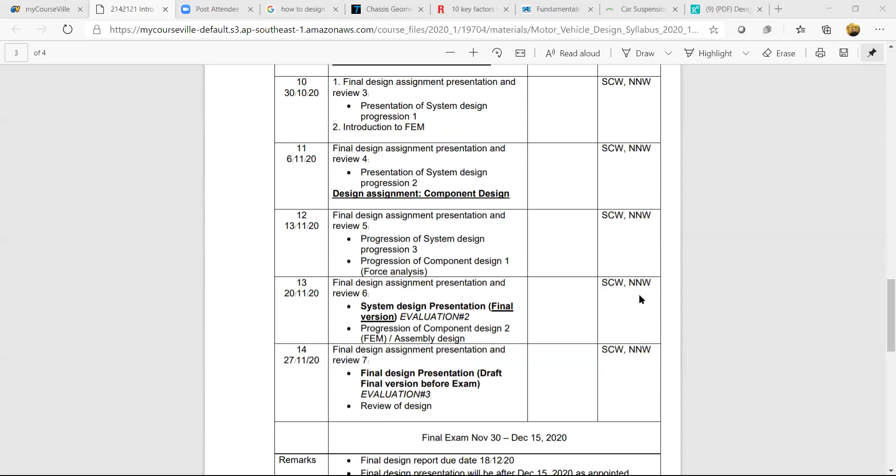Okay, first I would like to update about the study program in the syllabus. Again, you can see we are now in week 7, and after this week there's no more review or lecture, but it will be comments for your works. Okay, this means I will give you an assignment, and you follow the instruction and make, for example, this time the conceptual design, and we will evaluate you every week. Okay.

Next week on Friday there will be the commencement day, but for the bachelor degree it's not on the Friday. So I guess we will still be able to do the online class anyway. So next week you have to present the first draft of your conceptual design progression. And after midterm week, we have the presentation for your conceptual design. We don't have a midterm exam for this subject, but you have to do the conceptual design and present after the midterm week.

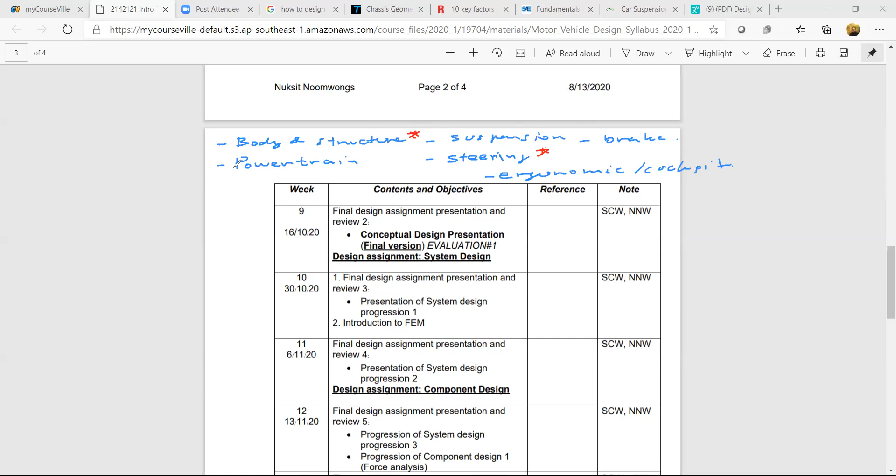As I informed you before, you will have several systems. For example, body and structures, powertrain, suspension, steering, and brake. Some extra work will be included related to many systems. For example, ergonomics and cockpit. This will concern many groups, for example, body and structures, steering, because you concern with the cockpit, and powertrain and brake also have to concern with this.

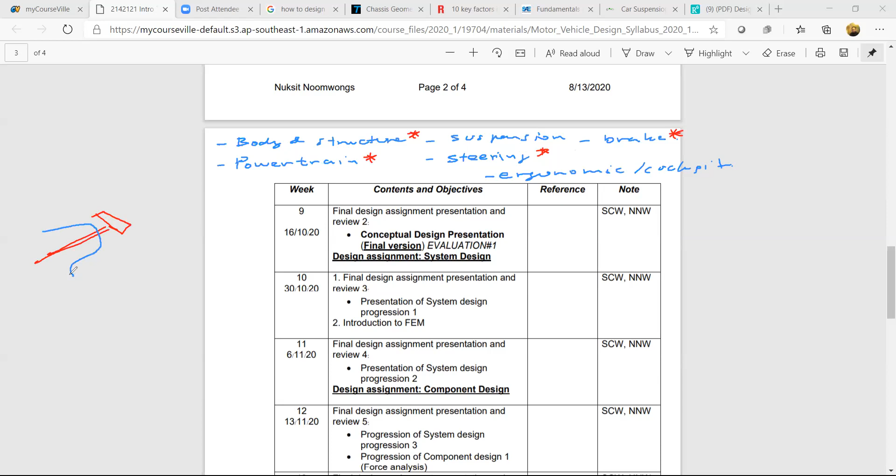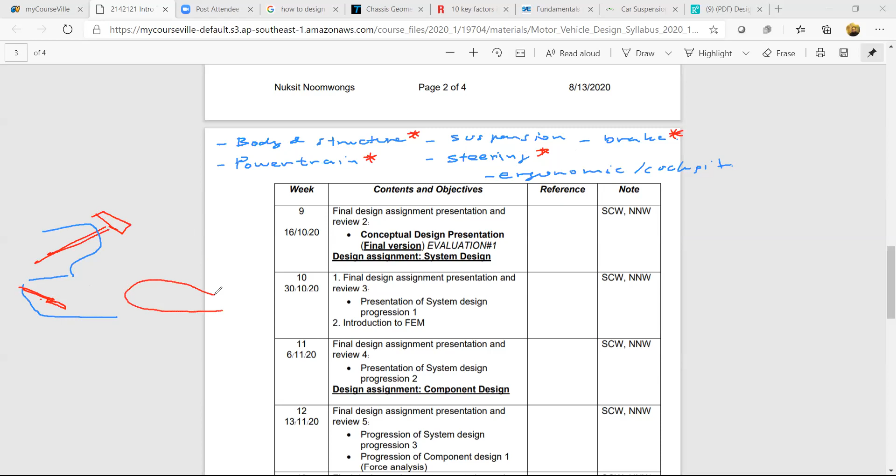Okay, because when you design your steering, you have to consider the ergonomics, and you have to know where your consoles are. And also for other groups, you have to know where your pedals are. And push out the seat. Oh, sorry. Okay, so everything has to be considered in the ergonomics of the vehicle. So it's concerned with many groups.

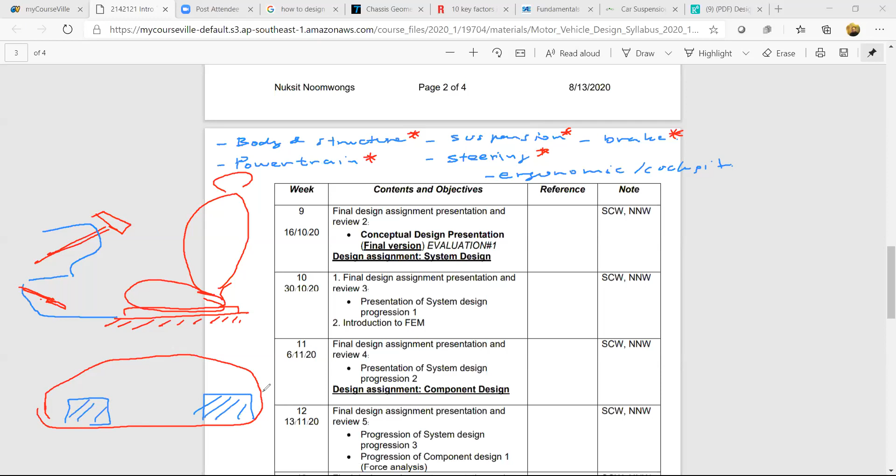Okay, maybe only suspension is not concerned much about ergonomics, but actually you have to concern with ergonomics as well, because when you design the layout of the vehicle, the suspension may have an effect on the space in your vehicle, both in the front and the back, and it has an impact on the design of the cockpit as well. So suspension still has something to do with ergonomics and the cockpit design. Okay, you have to work together with your friends.

So in these 5 groups, you have to decide who will be in which group, and the number of people in the groups. I can say that the maximum number of people for body and structure is 3. Suspension is 3. Steering is 2. Brake is 1. Powertrain is maybe 2. I'm not sure how many people are in your group. For this, you have about 11. You have 12. You have to consult with me about which group the extra one should be in.

Okay, this is the number of members in each system in your groups. Okay, so this week you will have some score, and you have to present every week. The week after that you have to present the progress for the system design. We let you present progress two times, for two weeks, because you take time designing the system. So we let you have a mini progress presentation.

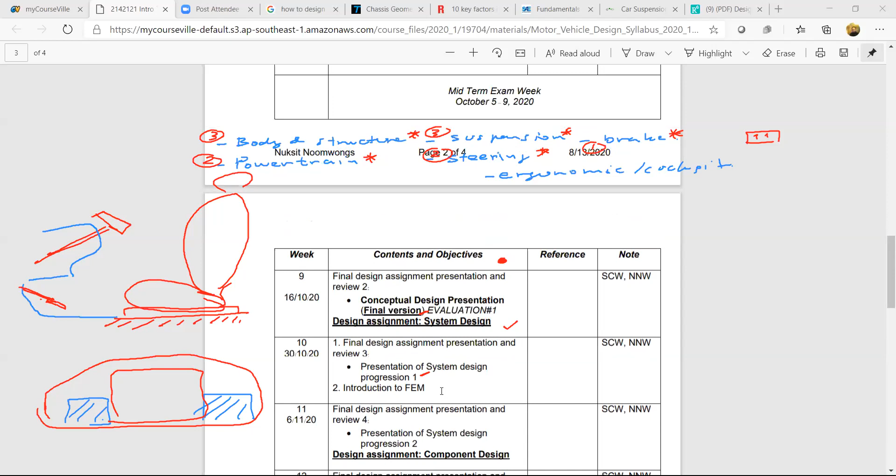We let you present the draft of the system design for three weeks. And along those three weeks, we give you the next assignment about the component design, concerning the detailed designs of the components inside your systems, as well as the analysis of the strength of your components using the finite element method. Okay.

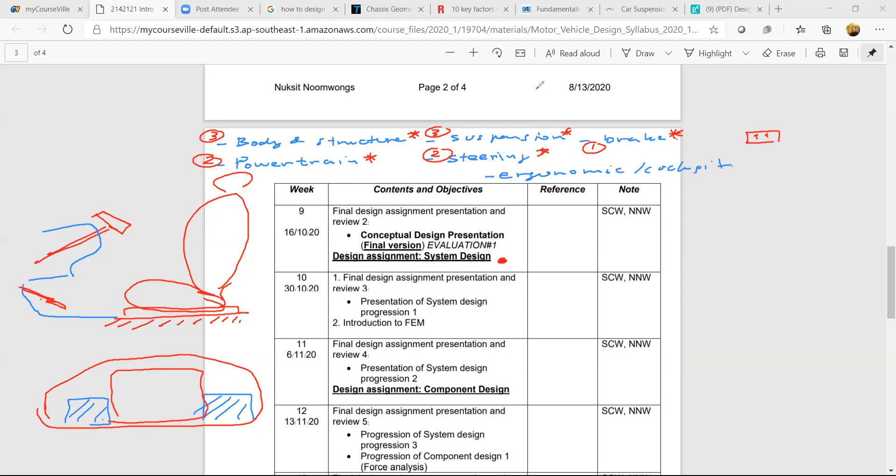Okay, so you can see that you will have score again in week 13. You have to present the final version of your system design, and we give you score, and also show the progress of the component design too. And in the last week, week 14, you have to present your final design, and we keep the score. But this is not yet the final

exam. You still have time to complete your work until the final exam date, which will be around the middle of December. The design report due date has already been set to December 18. And before you have the final presentation exam, you have to submit the final draft version. I will let you correct something after the

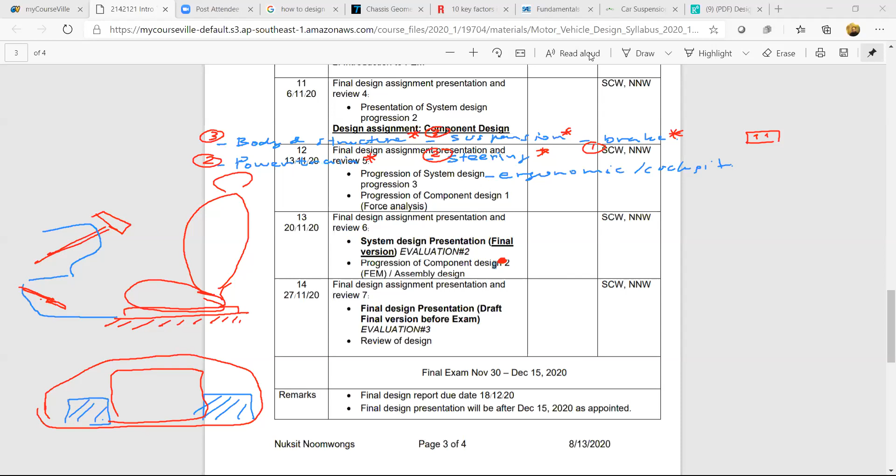presentation exam. In the presentation exam, you will present your work to me and Ajahn Sanhapos, and we ask some questions like an oral exam. In the oral exam, it will be only one student. It's a one-by-one exam, so it takes time for your final exam. Do you have any question about the plan for our class after this week?

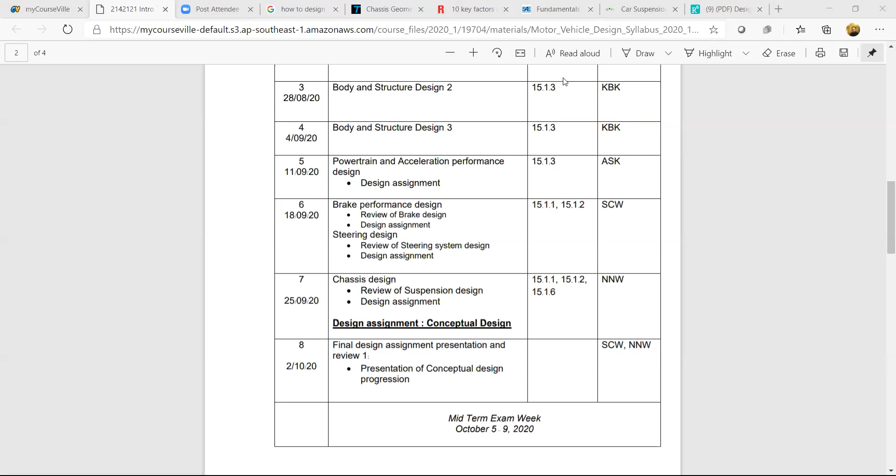You can see that for assessment, the evaluation of the design assignments, which are conceptual design, system design, and component design, is 30%. That's quite a big number. And every week that you present your progress, you also have points, but smaller, about 3% per week. Another one is homework or assignments from each instructor for 10%. The final exam in total is about 45%: presentation and oral exam is 20%, and the final design report is about 25%.

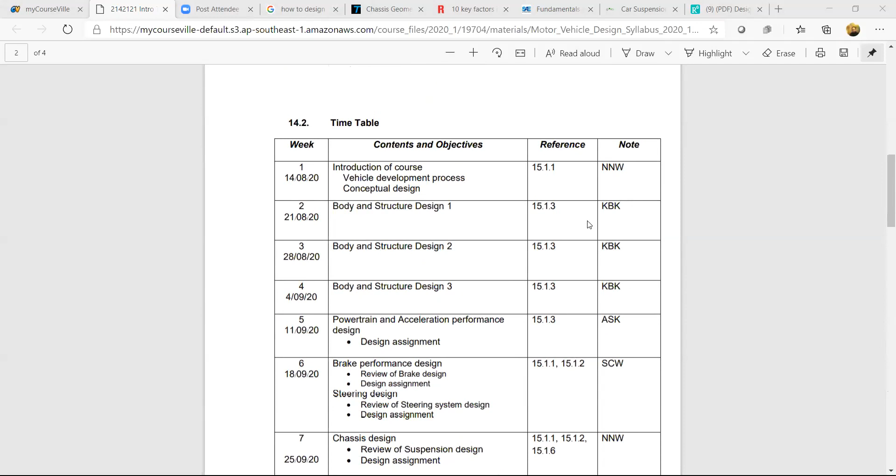The number is a maximum, so you can reduce the number per system in the group. For example, you have 9 people, you have body structures... Last semester, some students worked on two systems because of their own interest. It's also acceptable, but you have to inform me first. If you have 9, maybe body structures 2 or 3, powertrain about 2, suspension 2 or 3, steering 1, brake 1. So about 9.

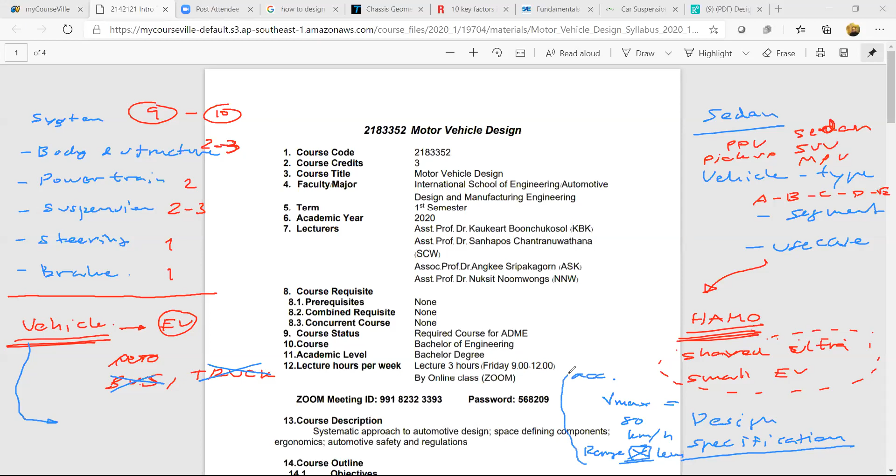Then from this you go further in terms of design specification for the powertrain: what is the motor size, what is the battery capacity, what is your drive pattern from motor to wheels, and so on. Then in the system design, you have to do the design in detail with calculations to know exactly what size of motor you need.

And you have to evaluate your design, testing with many scenarios that your motor has enough torque and power to cover those scenarios. Or from the detailed calculation, you can check the precise number for the range, because you have to decide the size of your battery in kilowatt hours. Then you know the usage and energy consumption, and you can evaluate your range design.

For suspension or other systems in conceptual design, you have to link to the use case too. For example, if you design vehicles for the sport market, you have to think about good handling rather than good comfort. So the suspension design will aim for good handling in the type of suspension you choose for front and rear, and how to design the springs and dampers in your vehicle. The values will be different from vehicles that need more comfort than handling.

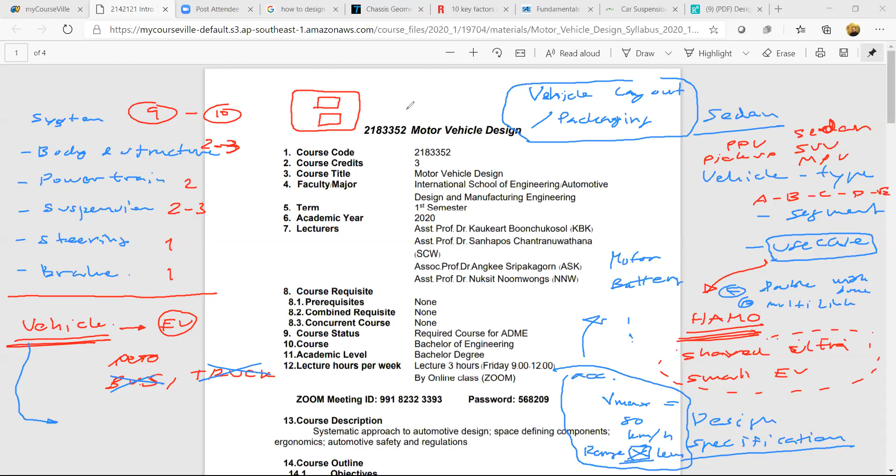You have to decide about the space in your vehicle. Which space is spare for the cockpit that has 2 seats? How is your drivetrain pattern? Okay, it will be front wheel drive or rear wheel drive or all wheel drive. If you choose front wheel drive, where is your motor? Your motor can be at the front wheel, drive the front wheel, or the motor can be at the rear and drive the front wheel. It depends on your design.

And when you look from the front view of the vehicle, you can see the wheels, the suspensions. Different types of suspension give you different space. For example, if you have the MacPherson strut here, you have like this one, and then you have to do like, okay, where's the motor? Where's the differential gears? Where's the drive shaft? Where's the steering?

Okay, so you have to sketch the layout and the packaging and check that it can fit in your dimension of the car or not, because you have to decide the dimension of the car: the width, the length, the height, the wheelbase. So packaging layout is very important, because after that you will use this as the start point of your system design. Every subsystem in your team will use this as the same information that every system shares.

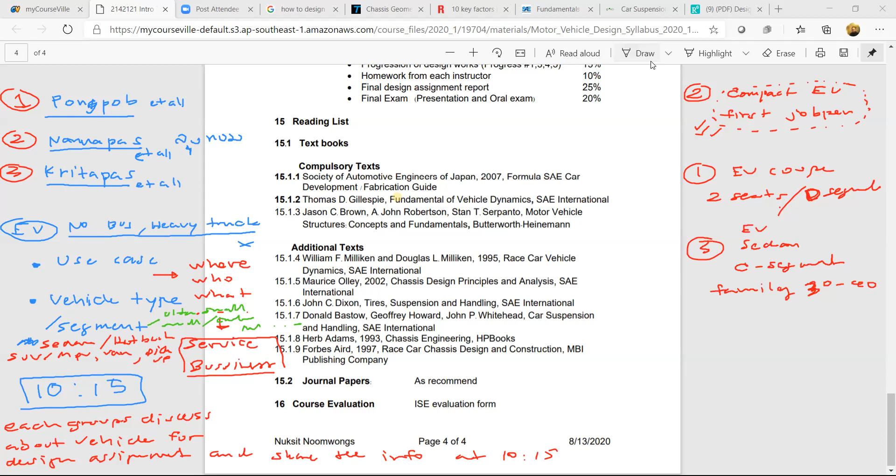Okay, next let's see our assignment in myCourseVille. I think you can see it now. I pushed many documents and information websites into myCourseVille. For the suspension, I put 3 items in the lecture slides folder. I will explain this later on when we talk about suspension. I will talk about the assignment first.

When you go to the assignment, you can see the assignment title, vehicle benchmarking and conceptual design. When you click on that, you can see some instructions. We have two sub-assignments inside. The first one is benchmarking, the second one is conceptual design. Actually, conceptual design is the bigger one. For the benchmarking task, I will ask you to define the target of benchmarking. That's what you did as we discussed.

You know about your vehicle: segment, use case, type. Then you can select your benchmark vehicles to be close to your vehicle. Sometimes if you cannot find exactly the same, benchmarking to vehicles that are close to your segment is also okay. Clarify the use case, the usage or type of vehicle. You already did it here. Second, you have to choose at least 4 vehicles for the benchmark, and you can find information from any sources, from websites, from anywhere.

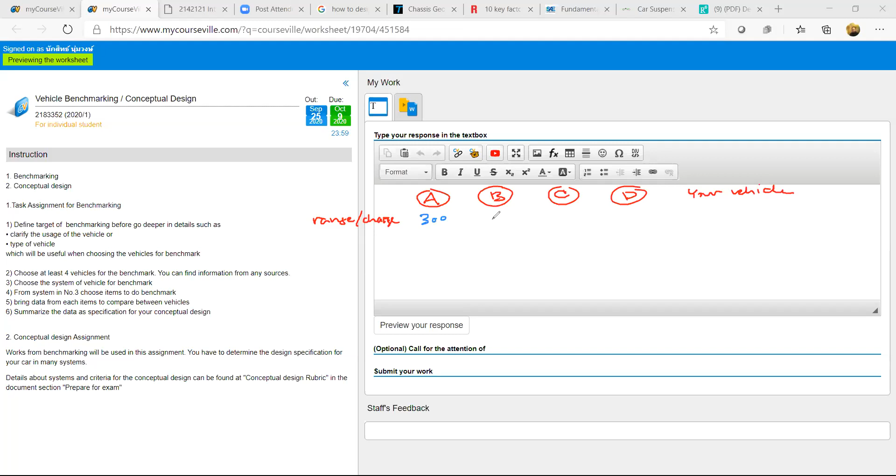Okay, we may have many items and systems to benchmark. For example, if you do benchmark about range per charge. Okay. Vehicle A, for example, has a range of about 300 kilometers per charge. Vehicle B has 250. Vehicle C, 400. Vehicle D, 350. So what is your range as a target for your design?

Okay, the target for your design is called the design specification. So how can you decide which range number should be your design target?

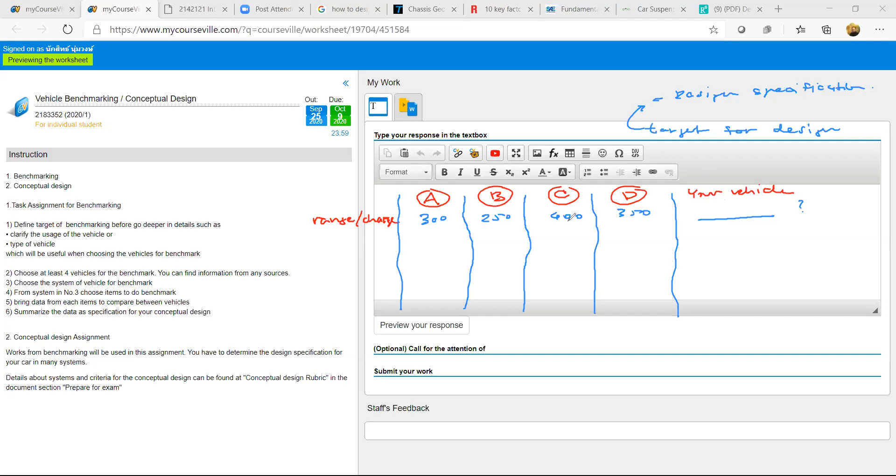Someone said, okay, we go to the top. We always go to the top. Okay, top is 400, we go 400. Or someone says, okay, we go minimum. Then you get 250. Or someone says, we do average of everything, and we get our design target. Which one is correct?

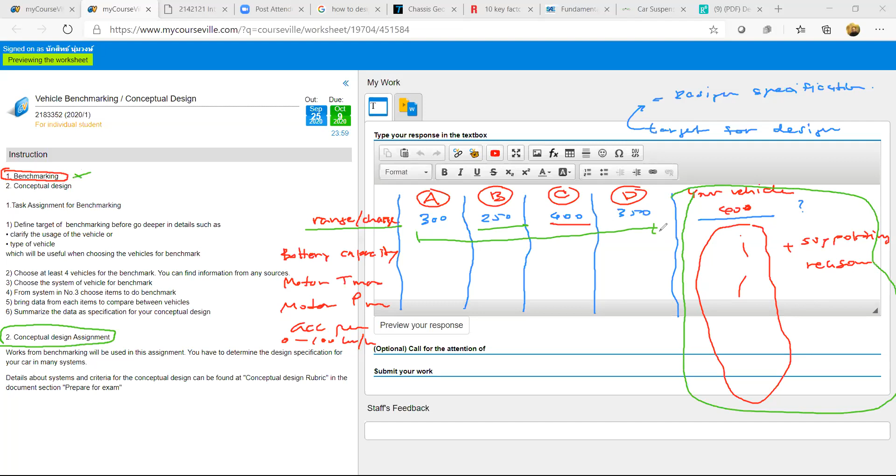This part concerns the conceptual design for the design specifications. The first one, just comparing is enough, but the second one you need design specs with reasons, and you can know the conceptual designs for car systems and their criteria from the document, conceptual design rubrics. I posted it in another section, in the prepare for exam. Okay, so if you go there,

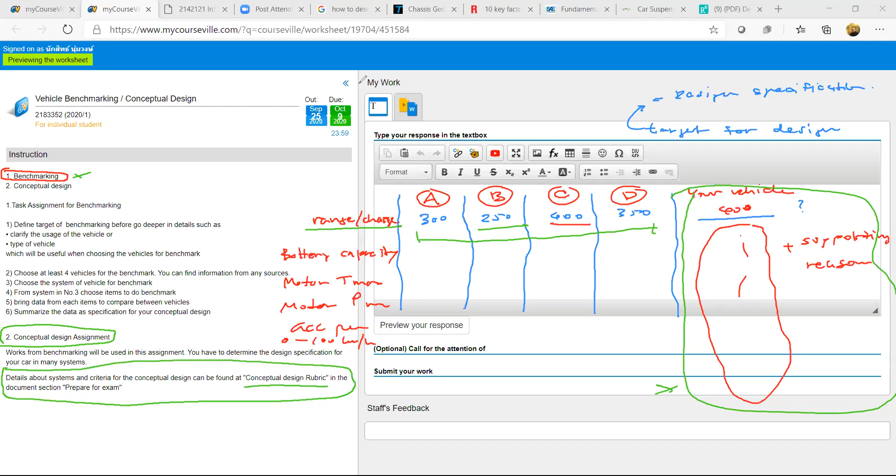you can see the folder exam preparations. And if you click it, you can see the conceptual design rubric. Okay. When you click it, you can download the document that is the rubric for the conceptual design.

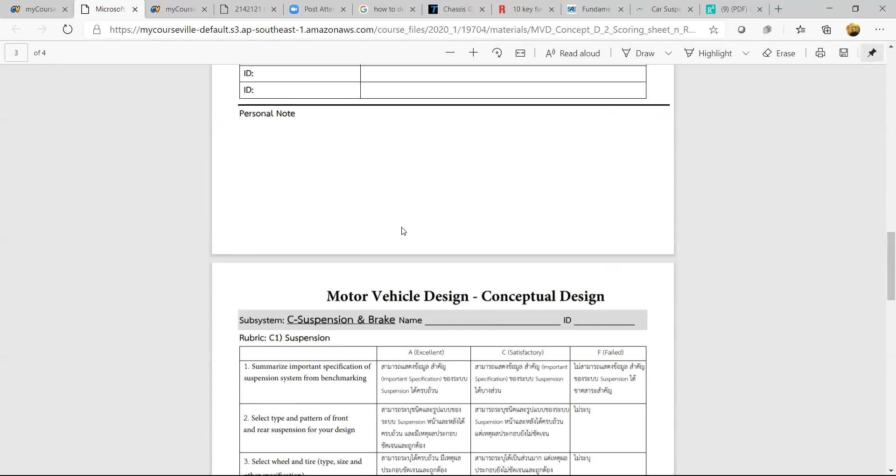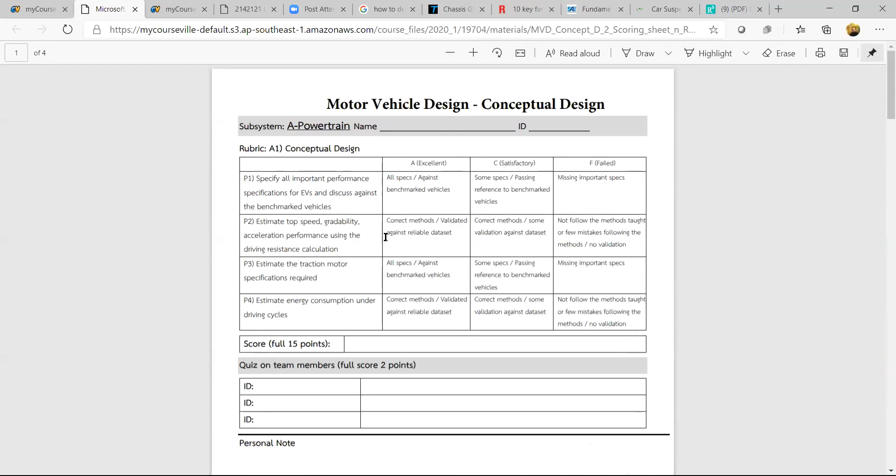You can see that it has the subsystems. First one is powertrain. Second one is body structures. Third one is suspension and brake. And the last one is steering and vehicle integration. Each system has details of what you should do in the conceptual design, with criteria: you get excellent if you cover all of this, just satisfy if you cover this, and fail if you cannot do it.

Okay, so for example, powertrain. The people in the powertrain groups should focus on this. Here you can see number one: specify all important performance specifications for EVs and discuss against the benchmarked vehicles. You get excellent if you have all specs against the benchmark vehicles. If you have some specs, maybe just satisfy. If you miss, it's fail.

Number two, estimate top speed, gradability, and acceleration performance using the driving resistance calculation. This may relate to the lecture from Professor Anki. For excellent, you do it correctly and have validated data. You get about C if you have a correct method but miss the validation. And F is if you miss the calculation and also the validation.

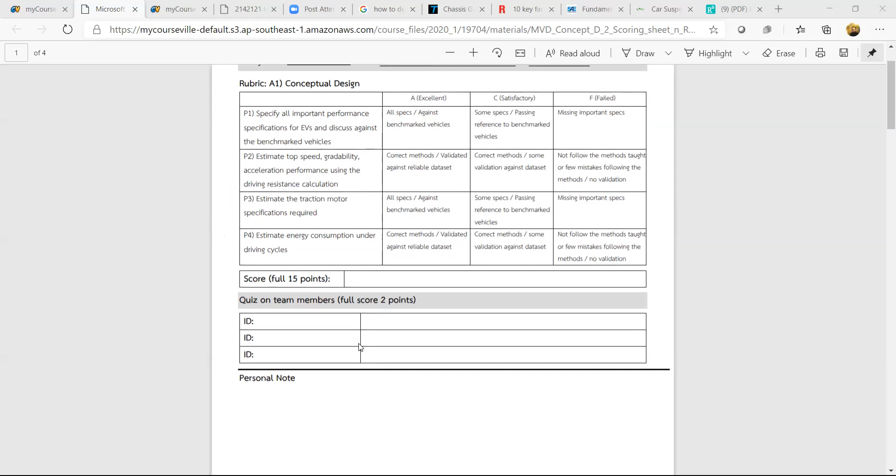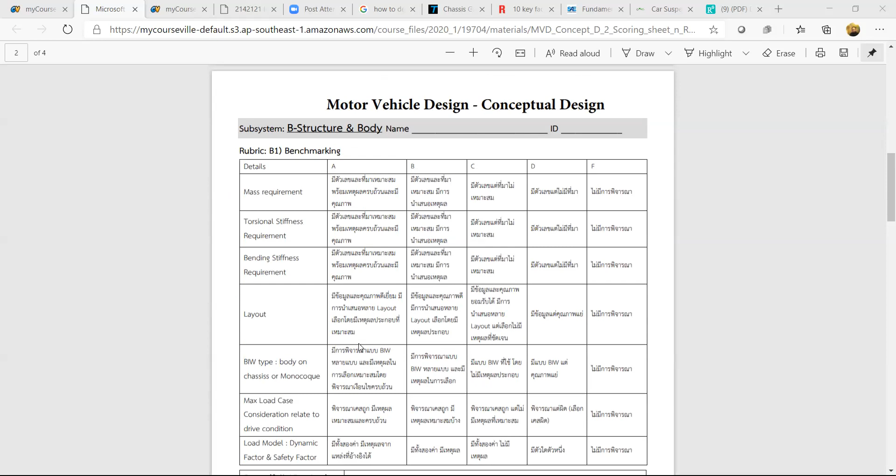That's about the first group, the powertrain. The second group, structure and bodies. Sorry that the criteria is in Thai, but the details are in English. So you can see that there are many details in this one. You can see the mass requirement, torsional stiffness requirement, bending stiffness requirement, layout of your structure, body in white type. You have to choose what type of structure you will design, body on chassis or monocoque.

Max load case consideration related to the drive condition. It's like you have to state which load case you will use in your design. You don't need to show any calculation, just explain what kind of load case you will use in your design. Okay, and the load models. It's about the value of dynamic factors or safety factor you will use. Okay, you don't need a lot of calculation. Okay, just a simple one.

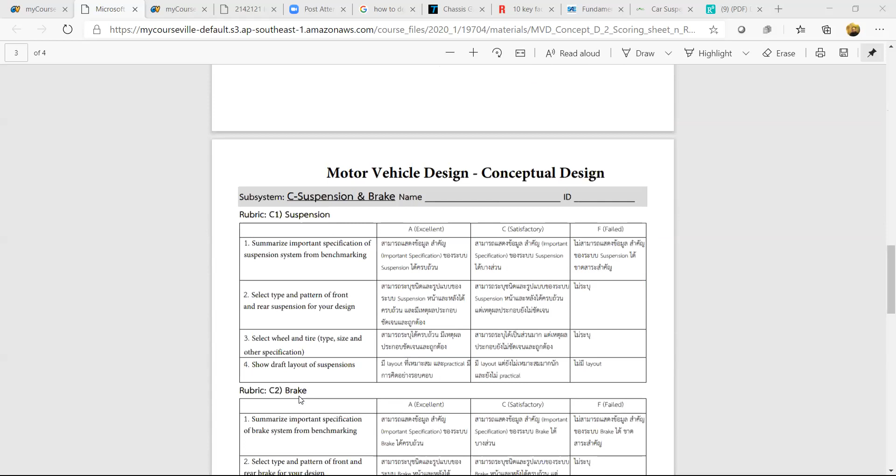For suspension, okay, you have to summarize important specifications of the suspension system from the benchmarking. Then select type and pattern of front and rear suspension for your design. And after that, select wheel and tire. Okay, you have to specify type, size, and other information that is needed. And then number four, show the draft layout of your suspensions. You have to sketch the layout.

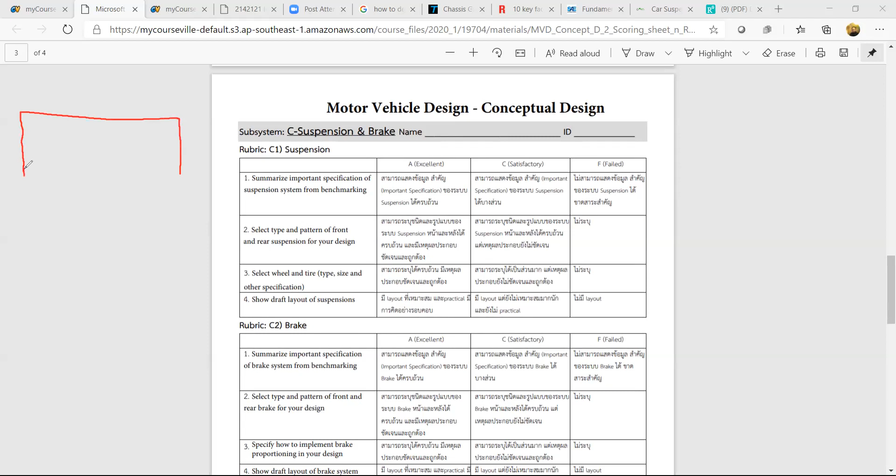In the conceptual design, I think design specification is one of the important things that you have to deliver, but another one is layout. You have to do the layout of your vehicles in the conceptual design in many views. For example, if you do it in the top view, you can show some information of dimension and packaging. For example, you have wheels like this. Okay, and then you can show the wheelbase in how many millimeters, or the size of the vehicle for total length, how many meters, the width, in how many meters.

Or when you see from side view? Okay, maybe your vehicle is like this, for example. The side view, you can see also information of the wheelbase, the height of your vehicle. You know the ground clearance. Okay, you know wheelbase, same as the top view. Okay, and then you can know inside the vehicle, not only the outside dimensions.

For example, for the top view, you should show where the batteries are. For example, if your battery is here, you should put the dimension of the components inside the vehicle as much as you know. Because you have to make sure that it can fit into the vehicle that you design, because you have limited space, limited dimensions. For example, if you just say that, okay, we have battery at the middle, and the battery size depends on capacity, and then also depends on the range that you need.

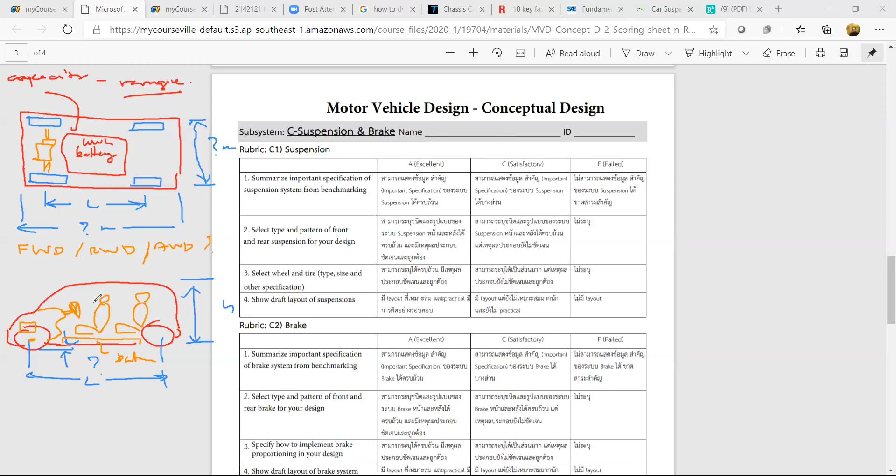Layout should have at least 3 views. First is a top view. Second is a side view. And the last one is a front view. You should also show the front view of your vehicle. For the front view, you can see some details of the front. For example, where your motors are, how they relate to the differential gears and the drive shaft, and where is your steering? Something like this. So you should show it with the seat inside the cockpit, something like this. So you have to show in 3 views, top, side, and front.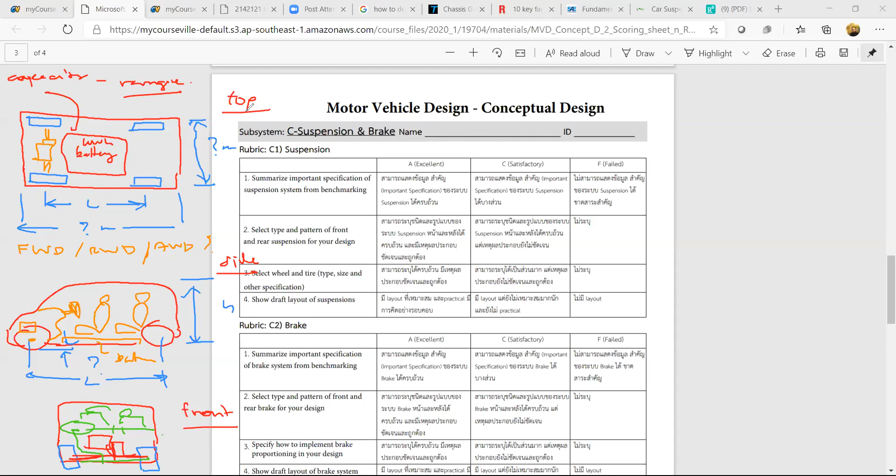At least 3 views. Okay, and we have the criteria, the rubric for the brake system. Okay, it's almost the same as the suspension. Okay, I think I should explain about the layout of the suspension. You can see that in the layout of these vehicles, I didn't put suspension into the layout yet. You should put it in the layout too, because the suspension will interfere with some parts if you didn't consider this at the first hand.

For example, here you may need space for the double wishbone or not. Where is a wishbone? Where is a spring? How can you see in other wheels? How about the rear wheel suspension? Maybe it's a twist beam or something, or double wishbone or multi-link. So you have to draw it. For this one, it can be a hand sketch, okay, CAD not yet needed. But for the system design and component design, you should do the CAD, okay.

For the brake, you do the same. You have to summarize the important specification of the brake system from the benchmark, and then select the type and pattern of the front and rear brake for your design. And then specify how to implement brake proportioning in your design. For example, if you use a proportioning valve, or you use something like electronic brake distribution control, you should state which one you will use.

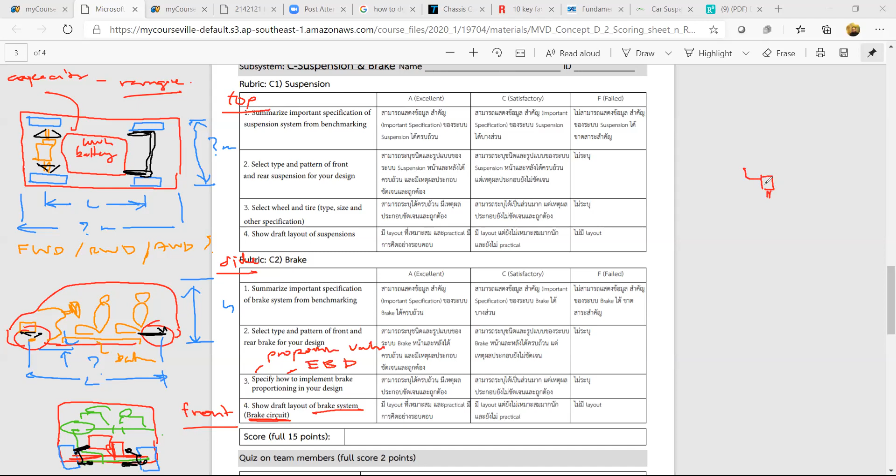Okay, and then you have to show the layout of the brake system. That means a brake circuit. So you have to draw from your master cylinders the circuit. What does this circuit look like? Okay, is this a diagonal type or front and rear or 4-wheel and 2-wheel or something? You have to draw the layout of the brake circuit.

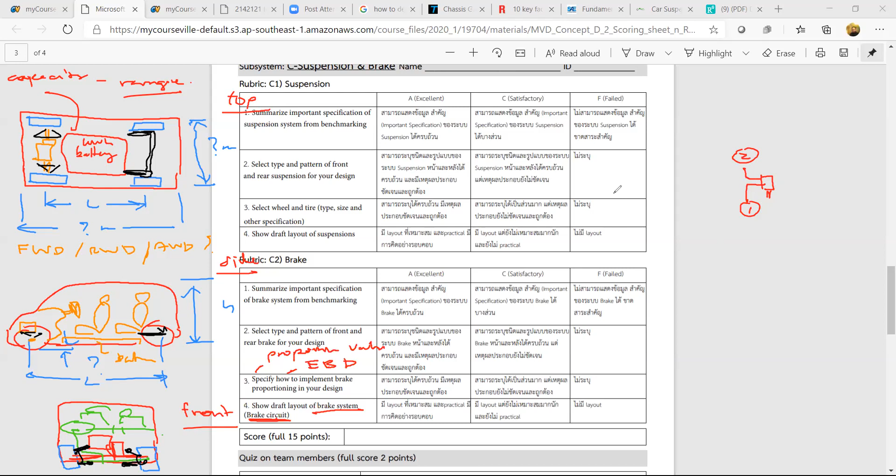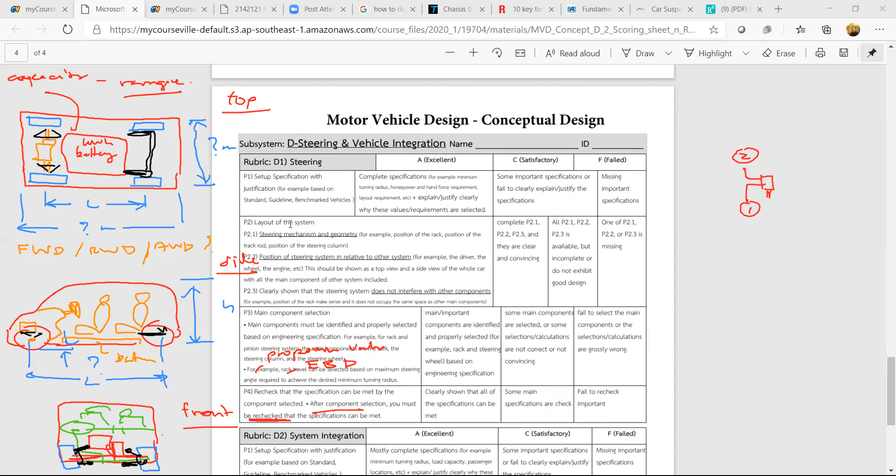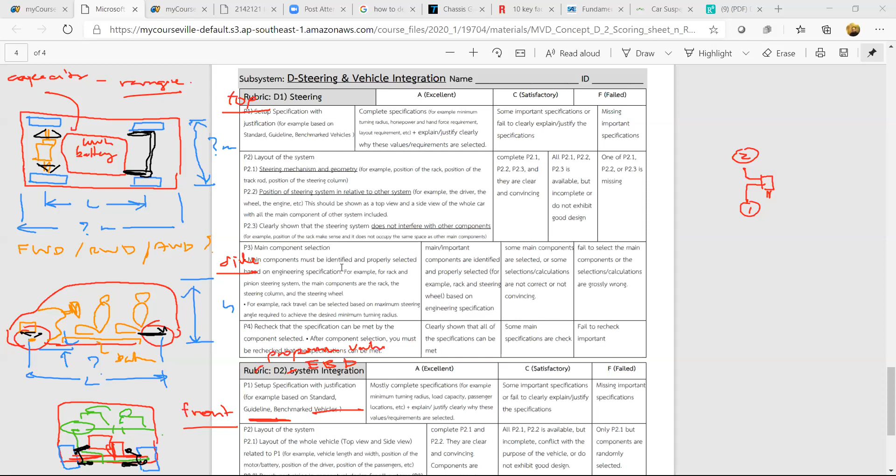Okay, and the last one is about the steering and vehicle integration. Okay, for the first step, you have to set up specification with the justification, based on benchmark again. Okay, and number 2, layout of the system. You have to lay out the steering mechanism and geometry, and also the position of the steering system relative to other systems, and clarify that the steering system does not interfere with other components.

Number 3, you have to select the main components of the steering system. And then number 4, recheck that the specification can be met by the components selected. Okay, and for system integration, it's about integrating systems together. This one has to work with many groups. Okay, it is a guideline. First one, set up the specification with justification. I think it looks the same as the steering system, but it is used for systems that integrate together.

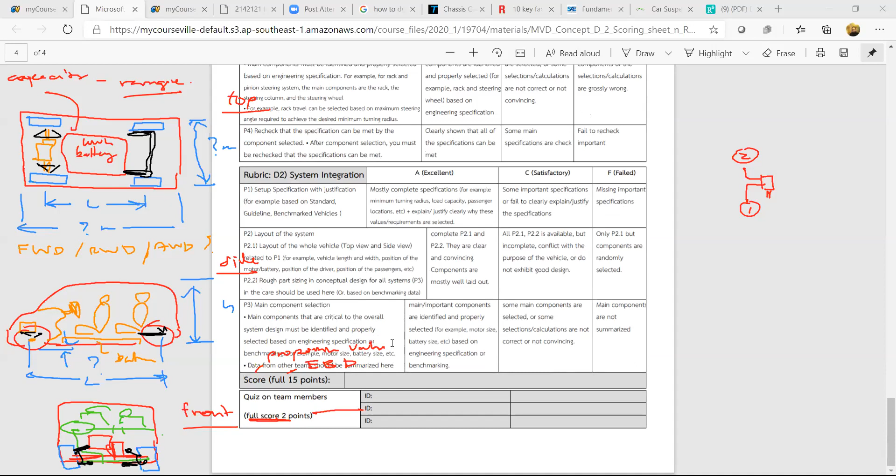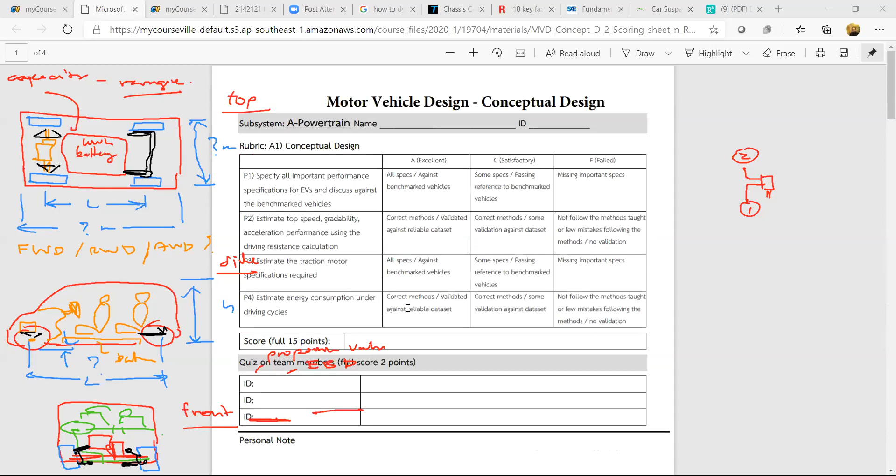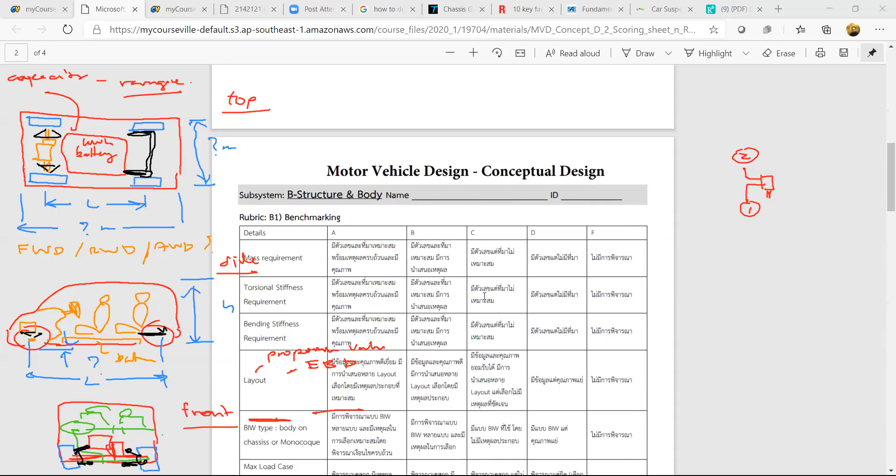Okay, so you use this rubric as your guideline for your conceptual design works. Okay, which parts you have to do, and don't miss them. Okay, and when we score, we will look at this rubric to see whether you meet all of the requirements or not. Any question about this rubric for the conceptual design works?

You can download it from the myCourseVille. ไม่มีเนาะเงียบเลย

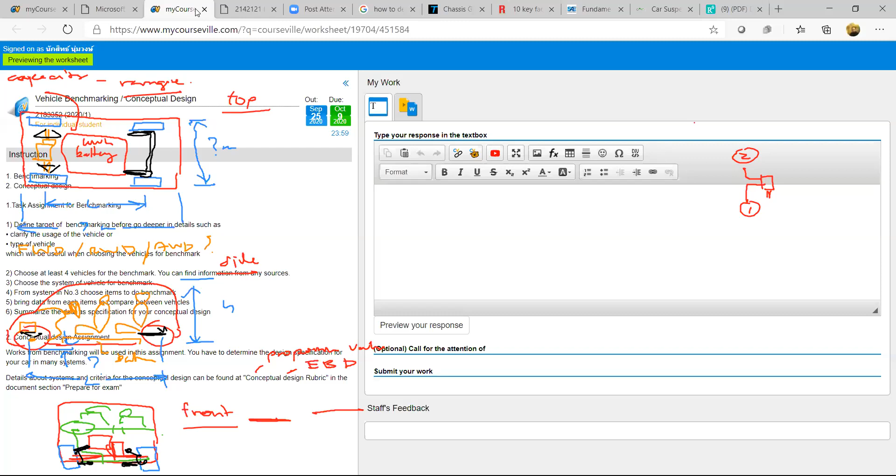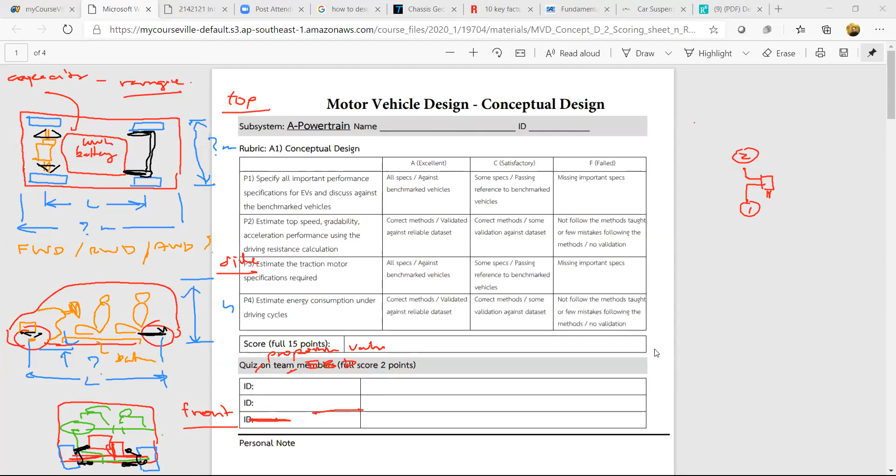Okay, if not, I would proceed to the suspension design review. Okay, next for the suspension design review. Oh, okay, before that, the assignment for benchmark, yeah? The conceptual design is a group work. But for benchmarking, since you have many people, you have to do some work to ensure that all of you have worked in benchmarking. Because you have like 9 people doing the benchmarking together. Maybe you have to choose many items to benchmark. Okay, this is a group work.

Okay, for the suspension, it's based on what you learned from the vehicle dynamics class last semester. We refer to the lecture slides and materials that we used in the vehicle dynamics class. But we will add on some more tools and information here. The step to design the suspension is, first, starting from selecting suspension type and pattern for the front and rear of your vehicle. It's been done in the conceptual part already. Okay, we should decide here in the conceptual design.

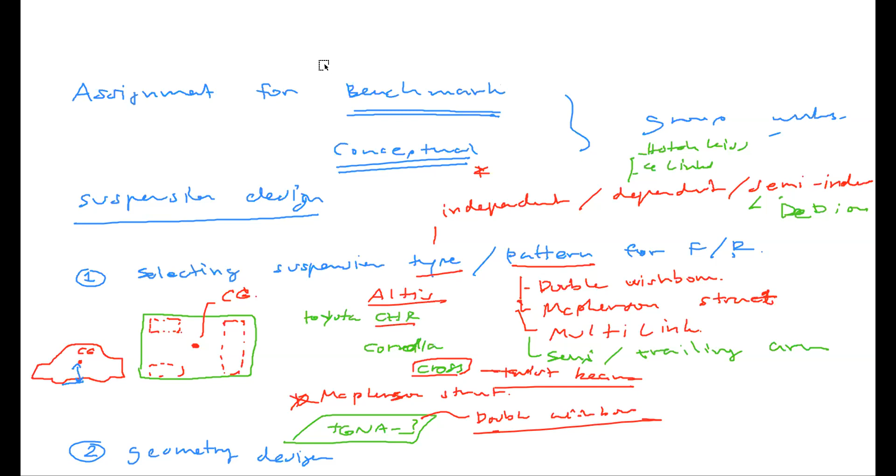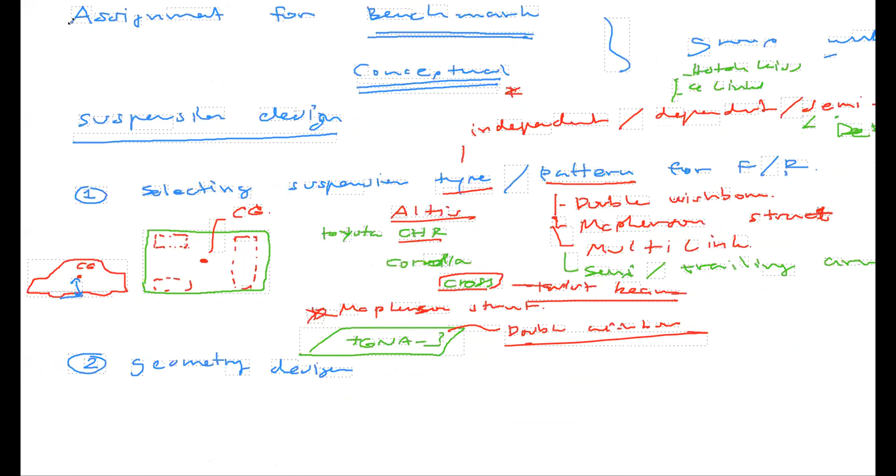Then after you select the suspension and do some layout analysis, you move to the next one. This is about the geometry design. What is geometry design about? What is your suspension geometry design about?

For example, if you choose a McPherson strut, you need to decide where to put the strut, the angle of the strut, and the control arms. It's about the coordinates of the major points. This one is the strut top mounting point to the vehicle structure, and this point is the connecting point to the knuckle. In geometry design, you need to know exactly these coordinates, X, Y, Z. This one as well.

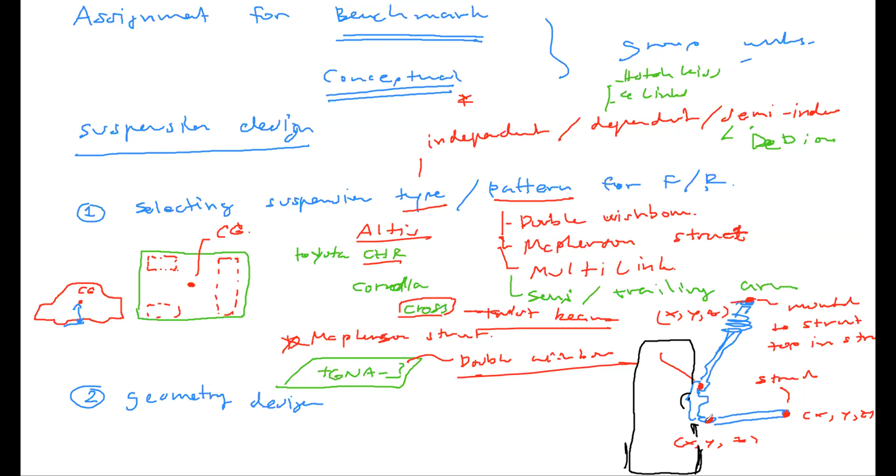Because different geometries give you different suspension performance in terms of handling and comfort, since this is used to control the movement of the wheels and tires. And for this part, we have supporting programs called suspension analyzer.

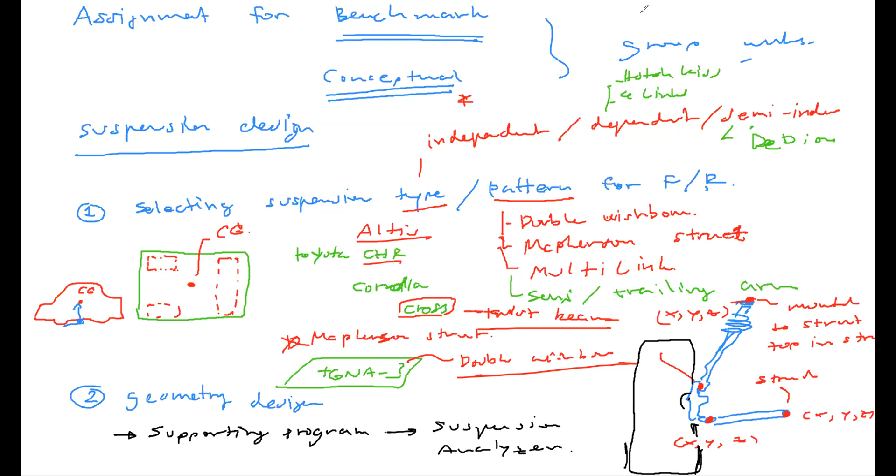Okay, in the suspension analyzer, you can use it to analyze your geometries of the suspension. You can know many parameters after you put the coordinates of the mounting points of the suspension into the system. You can simulate to know the value of many things.

For example, roll center, and how is the alignment. When you have, for example, roll angles of these degrees, how much alignment changes in your suspension, in camber, in caster, in toe, you can check it from the program.

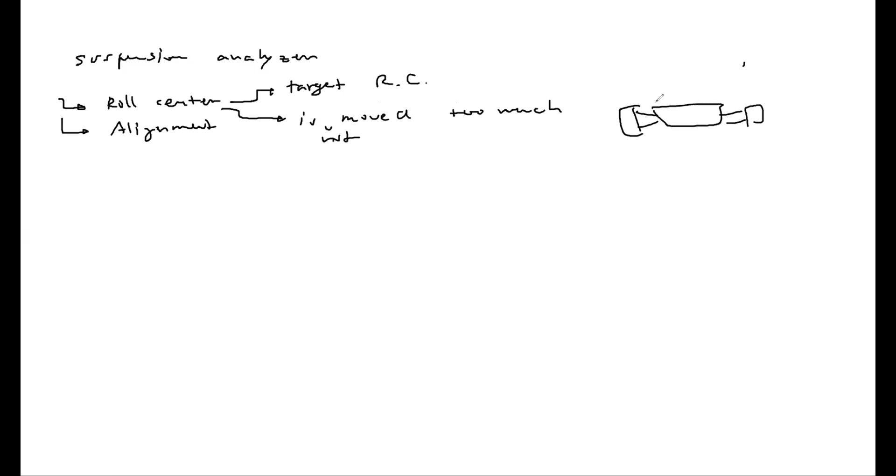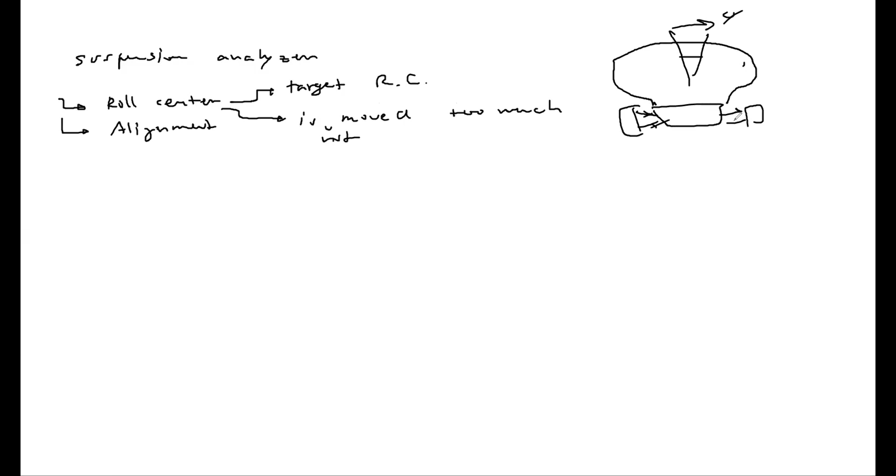So you may have to select your target for roll center, then change the geometry until you reach your roll center target. And you have to check that your roll center is not moved too much. Because when roll occurs, when your vehicle rolls, it can change the geometry of the suspension, and the roll center can change position.

We need to check how the roll center changes during the movement of the vehicle, such as roll motion. How it's moved in the horizontal or in vertical. If it moves too much, it's not good. We have to make sure that it moves within our boundaries that are acceptable. And also the alignment as well. If some alignment changes too much, it's not good as well.

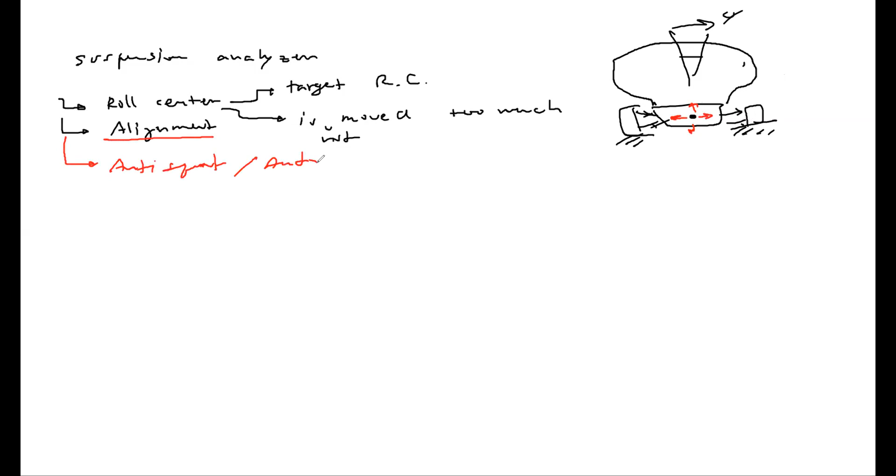You also have to think about the anti-squat, anti-dive. Anti-squat, maybe you have to think about anti-lift as well. So mainly you have to think about this in the suspension analysis in the geometries. Okay.

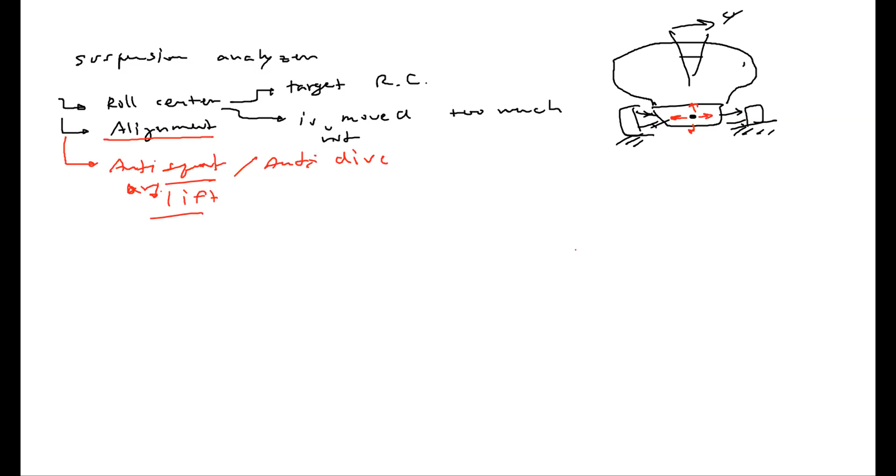Okay, let's go back to myCourseVille. You can see that I put 3 links for the suspension in the lecture slide folders. First, let's look at the additional materials for suspension and chassis design. It's a link to the website. And this website can give you some ideas to refresh your memories, to remind you about the suspension that you have learned. You can read by yourself.

And I think this website gives enough information for the review of the suspension. It has 4 pages. This one is quite interesting. You can see the section showing the upright or the knuckle in yellow color. We can call it upright or knuckle. It has the spindle in green color with the wheel hub, and then connects to the brake disc, and then the brake calipers, and the tire is not shown here.

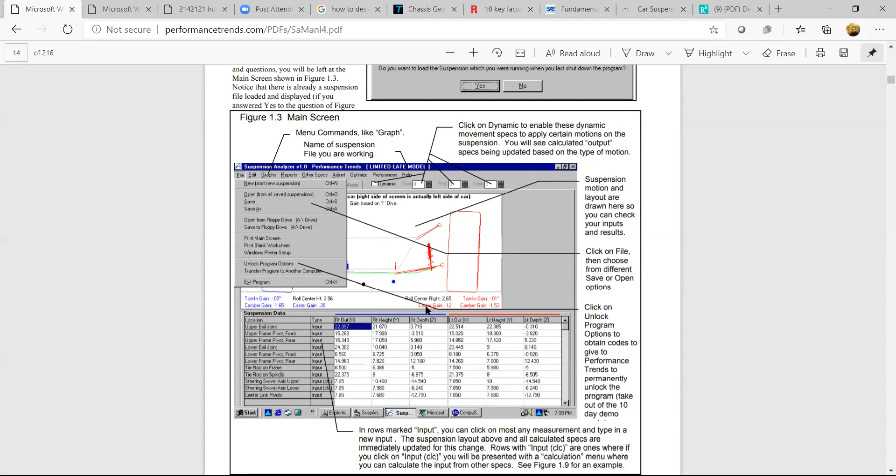You can see the link for manuals. When you click on that, you can get the manual for the suspension analyzer program. You can learn step by step by yourself. Inside you can see that it has a program like this. Then you can set up parameters in your suspension, and you can see parameters related to what you set. And also you can change some parts. You can get through these manuals. It teaches you step by step.

Okay, there is a lot of material inside, but if you need a shortcut, you can watch the videos. Here you can see the link for the program download. You can download the program from this link, and then we have the tutorial videos. The first one comes originally from the manufacturers, the suspension analyzer company, split into small YouTube clips here.

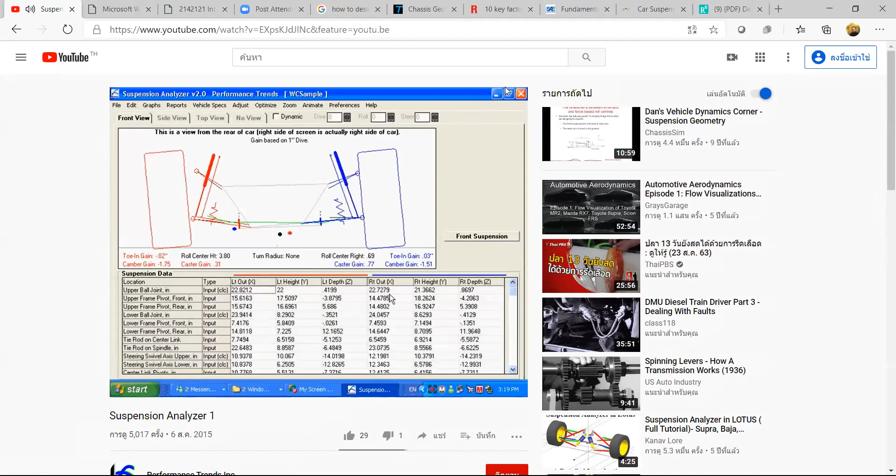Okay, I'll show you some videos. Starting at the main screen, Analyzer. Okay, today I'll show you how to use the program. Here you can see we're starting at the main screen. The suspension analyzer comes in 3 different versions. We have some files loaded in right here. So there you have inputs. Okay, so you can do it by yourself.

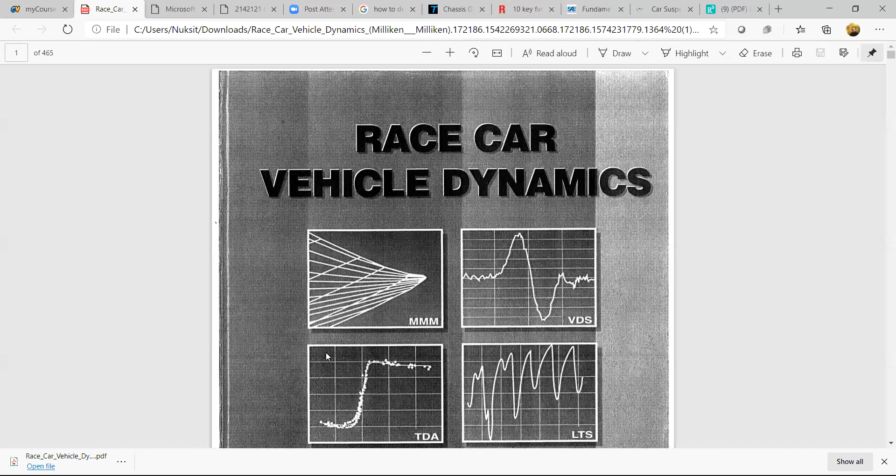The videos on how to use the suspension analyzer program are posted in the lecture slides. And the last one is a document for suspension spring design. When you download it, you get a textbook that is good for vehicle handling and racing, called Race Car Vehicle Dynamics. There are many chapters inside, 23 chapters, but I will not ask you to read all of them. So I put a note here that you should focus on chapter 16.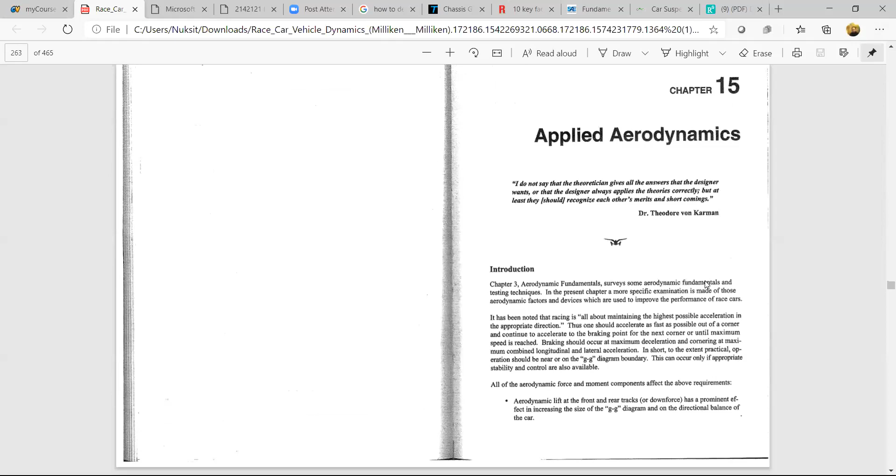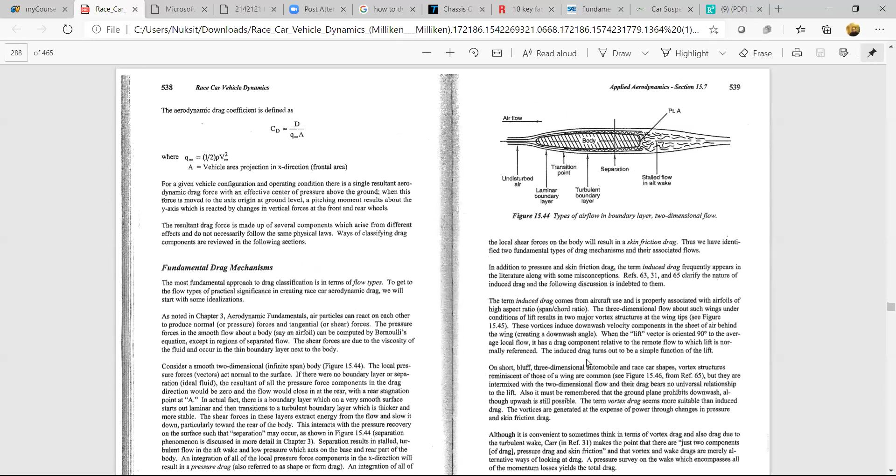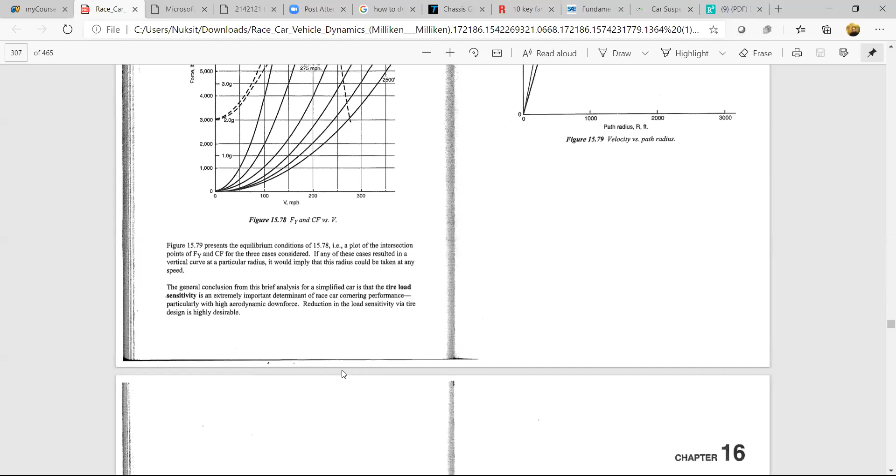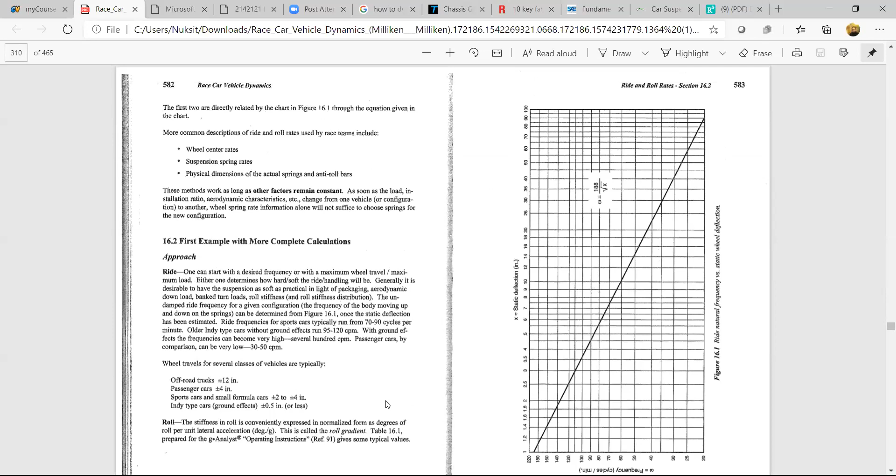Okay, what is chapter 16 about? Chapter 16 is about ride and roll rates. From chapter 16 you can get the requirements for the ride comfort of your vehicle and how to design the spring stiffness to meet them. Okay, this one is about ride and roll rates, with examples and calculations for ride. You can follow it step by step.

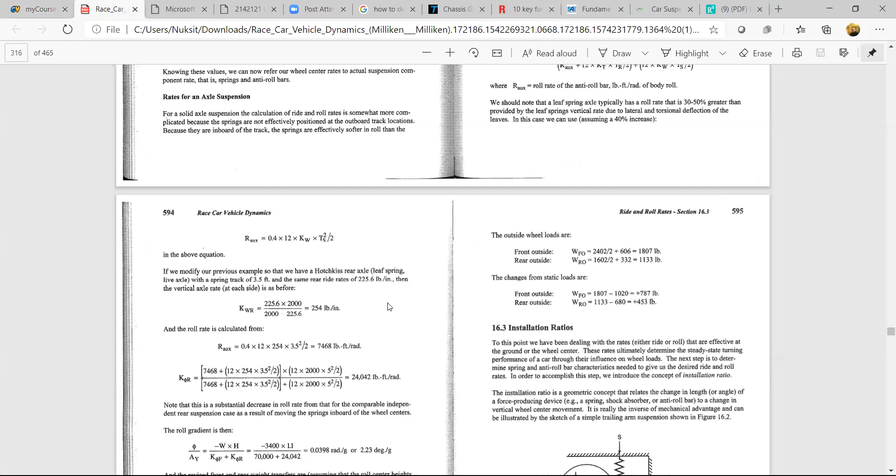Today I will not go into much detail about this. The group designing the suspension can read it later, because it has very explicit examples. In MyCourseVille, I guide you on which parts you should read. Oh, this one is copied twice, sorry. For the damper, you can choose a commercial off-the-shelf one in the market, then tune it to match our vehicle. So we mainly use chapter 16 in the textbook I gave you. Please study it and follow the examples when you design.

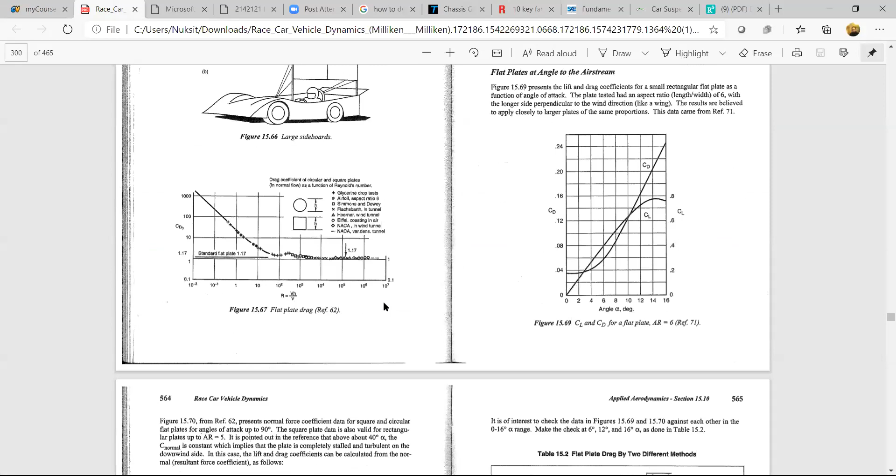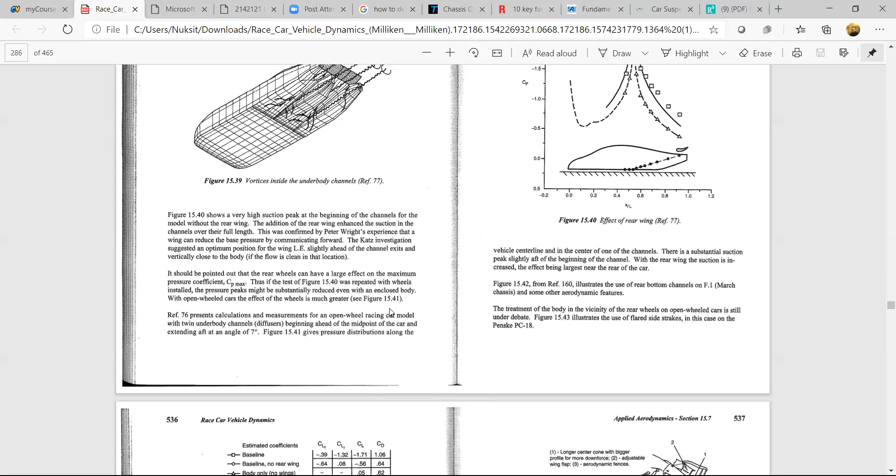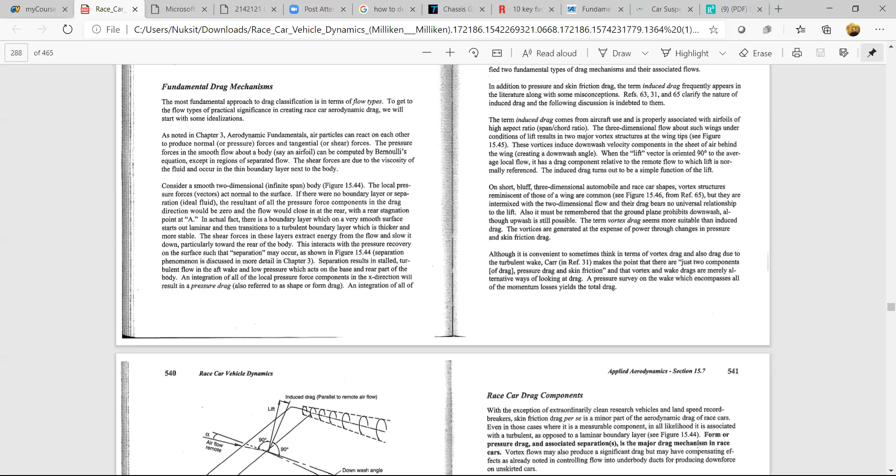Okay, any questions about the suspension design review? You need to study the materials I gave you. During the weeks of system design, I will comment and guide you when I see your work. Any questions about this part so far? Maybe not. Maybe you don't have experience with this yet. After you do it, you may have questions, and then ask.

So today, starting from the vehicle you chose as your design assignment, form small groups within your group for the task work, decide which system each will work on, and do the assignment for benchmarking and conceptual design. Next week we will see your first draft of your conceptual design. Please submit your work in the assignment. We should set up the groups in MyCourseVille; if I have to do it, please inform me of your group members, and I will open the assignment for you to submit before we meet next Friday.